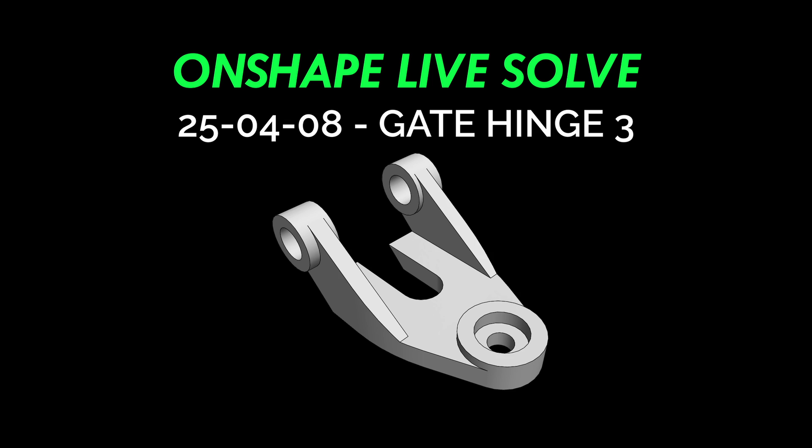And for today's live stream, just to kind of keep things rolling along, I'm just going to model this with you. So here we are. We're at TooTallToby.com. We're going to say get started, and we're going to take a look at the challenge 25-04-08. Now, if we go all the way down to the bottom here, we see that model is reserved for members who have the Practice Models Premium subscription.

But here at the top, we see that it is available in our featured challenge practice models. So let's get in here, 25-04-08, and let's try to model this up using Onshape. So I'm going to say click here to begin and reveal drawing and go. So what is the mass of this part in XXXX grams?

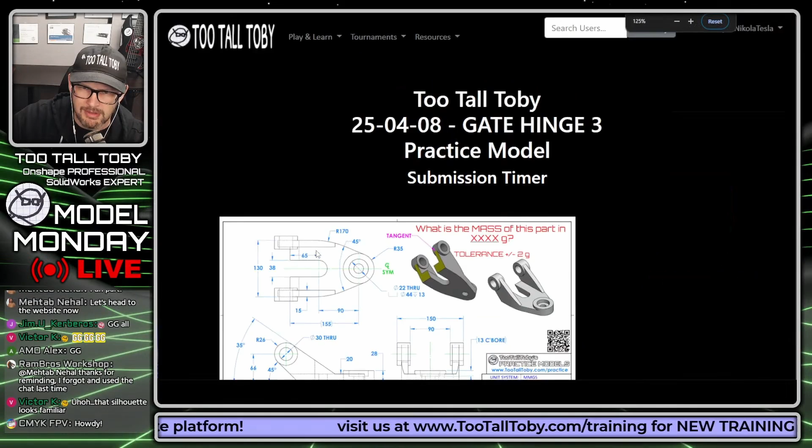And for a model like this, what I'm going to try to do first is ask myself, where should the origin be? Now, I know the clock is running. I know that I'm kind of burning off time here, but I think that if you come up with a good game plan, you can save that time on the tail end. So I'm going to try to model this part up, and I'm going to start out by asking myself kind of how I would build this part.

And I think that the way that I would build this part, feature by feature, I would probably start out with this kind of base section here and then build off of that. Maybe I'll build this fin that comes up and has this circular boss here, and then I'll mirror that across. Maybe I'll create a circular boss here, bring it up, and then I can do my counterbore geometry.

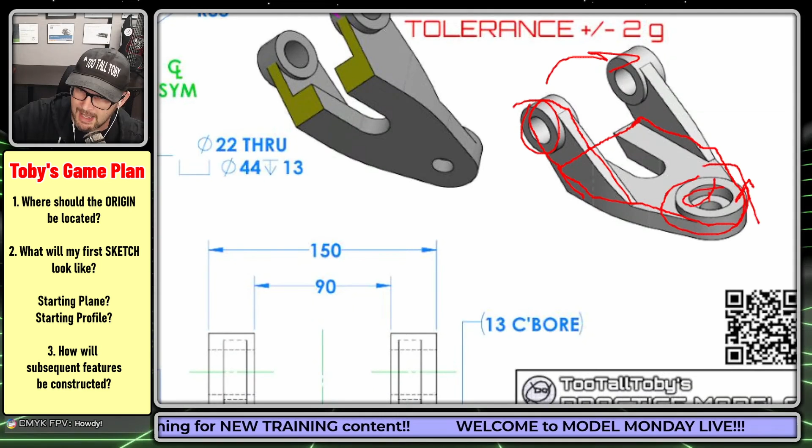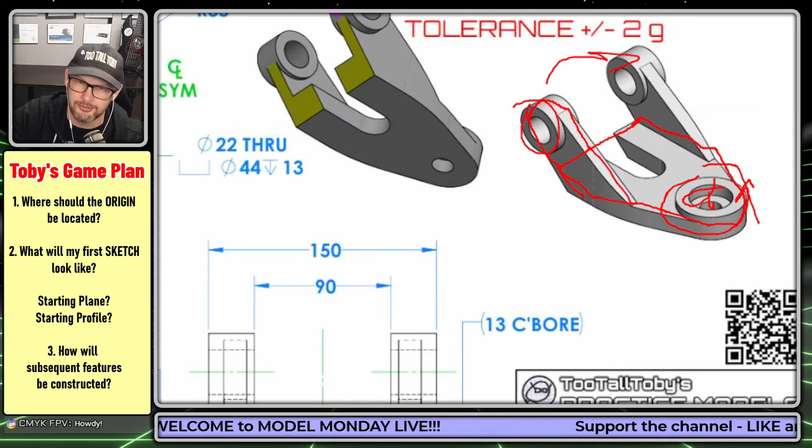So I think that's going to be kind of the general order that I'm going to use, but this is something you always want to think to yourself. If you've got something physical in your hand and you're going to model it up, look at it and ask yourself the order in which features should be built and the different types of features that you might be using to construct that model. So it looks like for this model, it's mainly just going to be extrudes, boss extrudes, cut extrudes. That should give me most of what I need for this model.

So now I'm going to get a little bit more nuance with my game plan, and I'm going to ask myself, well, where should the origin be? If my first sketch is going to look something like this, where should the origin be? And I think I'll put the origin right here. Everything is centered, it's center line symmetric, and I've got this 90 dimension and this 155 dimension here. So I think it makes sense to have the origin right here. It's a nice little baseline for some of my dimensions in the model.

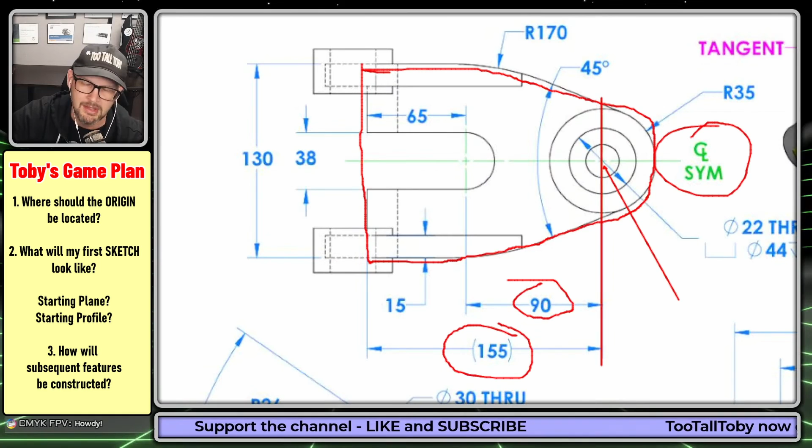So then the next question is, how much detail should I include in that first sketch? And I think that because I'm working in Onshape, I'll probably opt to include quite a bit of detail here and then just extrude from these sketches. Now, certainly if you're using a different CAD package, you could still use a similar workflow where you include all the information in your first sketch. It's just a matter of what you're comfortable with, and are you comfortable extruding multiple contours from the same sketch? And in Onshape, I am very comfortable doing that.

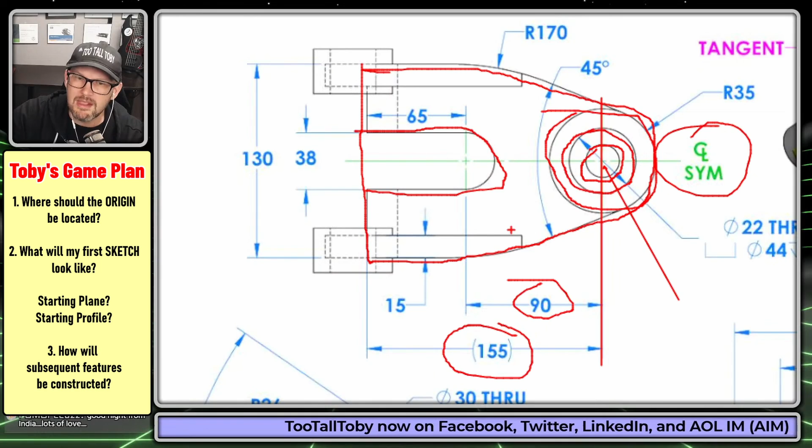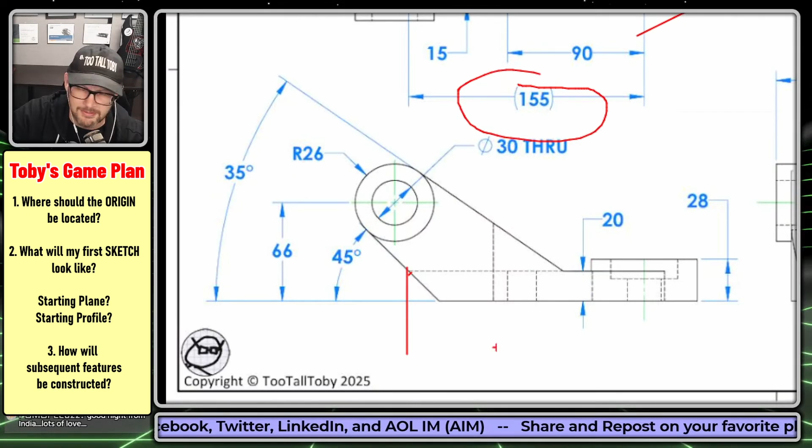Now, one thing that makes this model a little bit tricky is that we've got this dimension here, 65, or this dimension here, 155, which is coming from essentially this sharp edge right here, this blade edge that's being created by this 45-degree cut. So once we create the dimension to here, which is this 155 dimension, we're going to need to cut this thing off along the back side to leave us with that coplanar geometry along the back side of this part. And that's kind of the one thing that makes this model a little bit tricky.

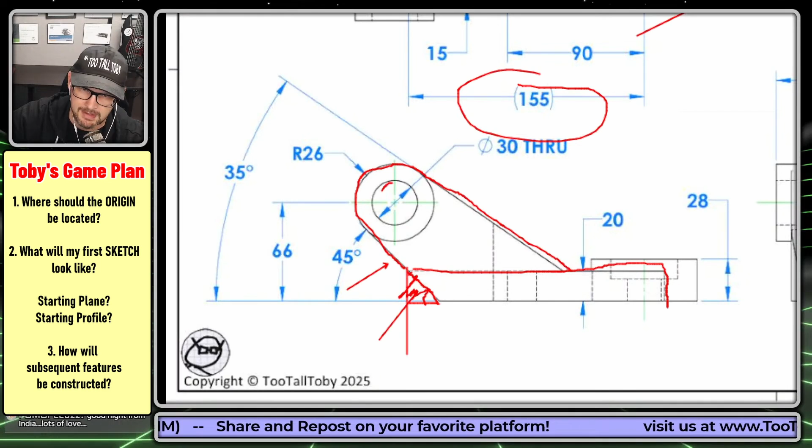So I think that after I create that basic shape, that basic extrusion, I'm going to pretty soon after get in there and cut away that corner. And then I think I'll create this as my next sketch. Create this geometry up here. Create that geometry as my next sketch, and that should pretty much take care of any of the tricky areas of the model.

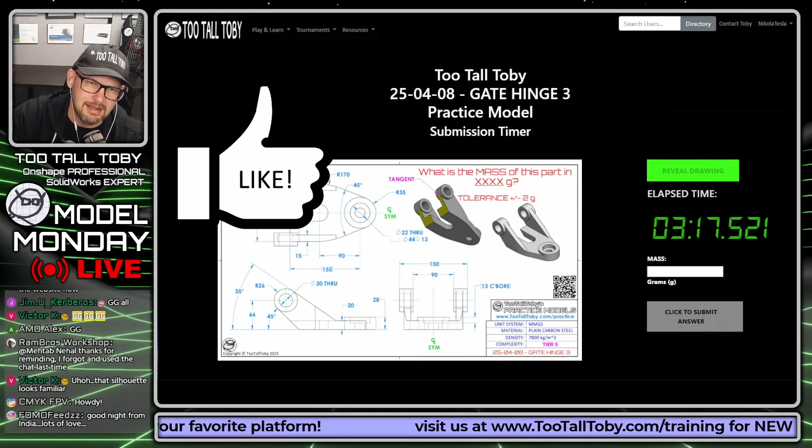Now, I know that at this point I've already run off 3 minutes of the clock, and that may seem like a lot of time, and maybe it could even seem like a waste of time to you. But like I said earlier, I think it's really important to take a few minutes and come up with a game plan before you actually jump into modeling the geometry. But now we are at that point. Now we are ready to model that geometry.

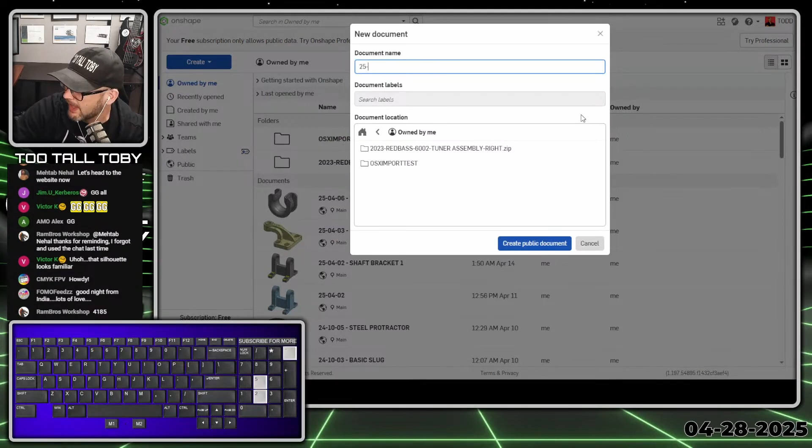25-04-08, gate hinge 3. I am going to create this in the public space, so if you are an Onshape user, you can always log in and search for this document name, and you can take a look at my entire feature tree and history in the Onshape history section. So you can always look through and take a look at my model.

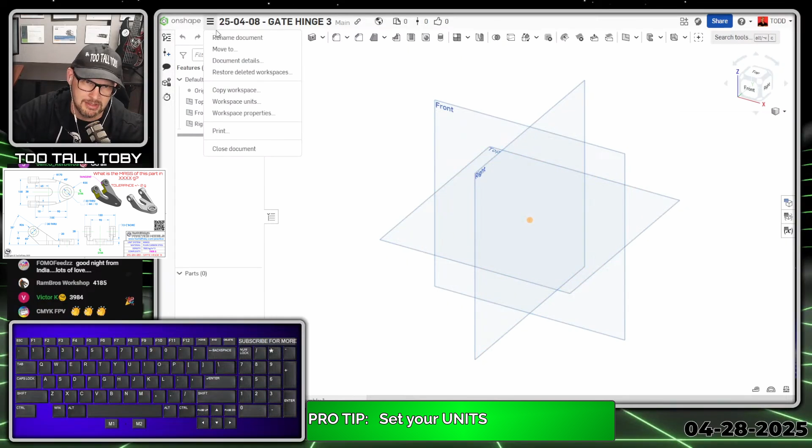And so now, following my game plan, the first thing I'm going to do is go to this hamburger menu, and then I'm going to say workspace units and make sure that I'm working in millimeters, make sure that I'm working in grams, which I am. So now I'm going to go top plane, begin a sketch, orient my view, and I'm going to do that using the N key to orient my view.

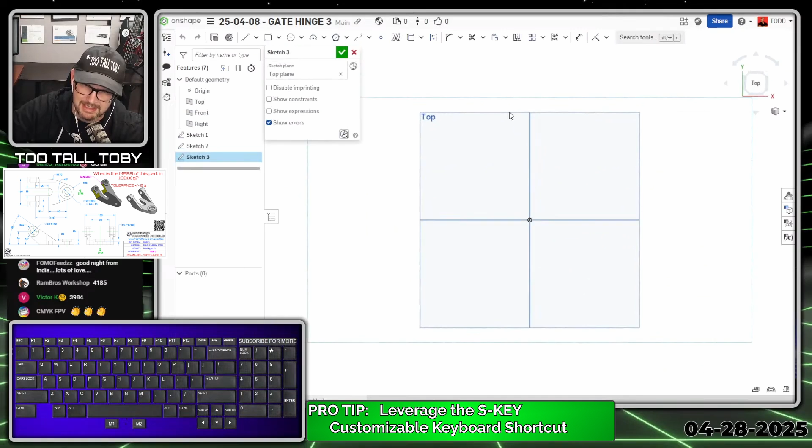So that workflow is pick the top plane, press the S key, begin a sketch, press the N key to get normal to, press the S key and jump into a circle command. And I'm going to create a circle here with a diameter of 22. That's my through hole. Create another circle here with a diameter of 44. That's my counterbore hole.

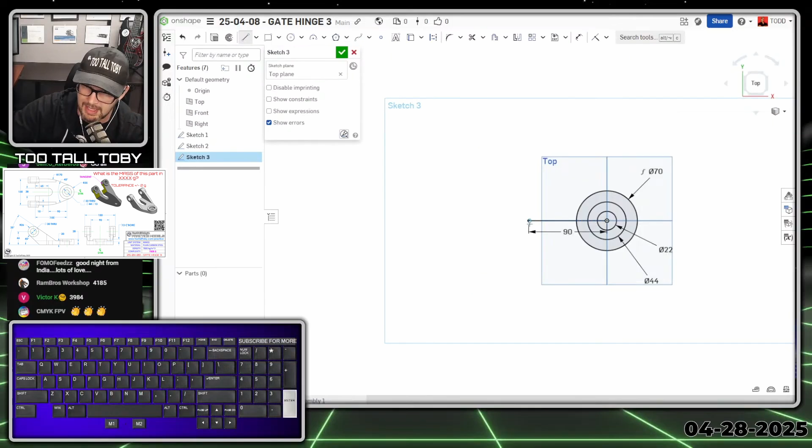And create another circle here with a diameter of 35 times 2. That's that arc that's out at the front of the model. So there is what the beginning of your first sketch should look like if you're following through as a tutorial. And then I'm going to create a line here, and this line is going to move over in this direction, and it's going to have a distance of 90, enter, and then it's going to move over in this direction, and it's going to have a distance of 65, enter.

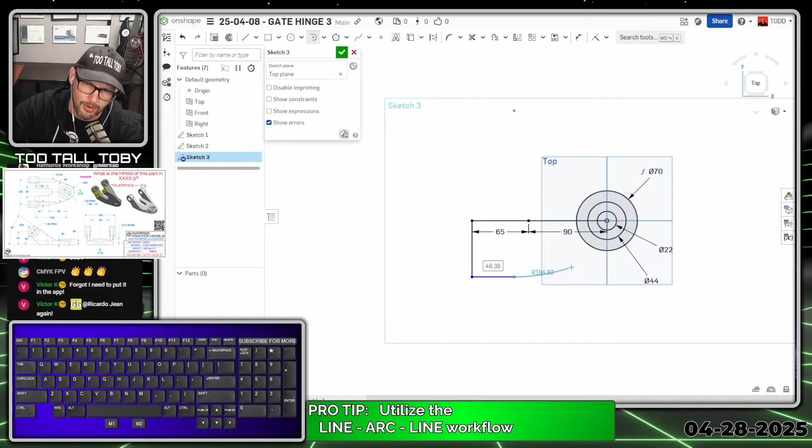Then I'll come out this way, and this line here is going to come over about 130 over 2, so about 65. Come over in this direction, single click. Now here's a little trick you can do in Onshape. You can move away from that end point, come back to that end point, and then move away again, and that creates an arc for you automatically. And when you left click on the end point of that arc, you can let go of your mouse and you can type in the dimension 170.

And then finally, I'm just going to take this line and connect it here on this point. I don't think I'm going to be able to get tangent to the circle and tangent to the line or the original arc. That's what I really want. I really want to be tangent to this and coincident to the circle, all three. That would be like the trifecta.

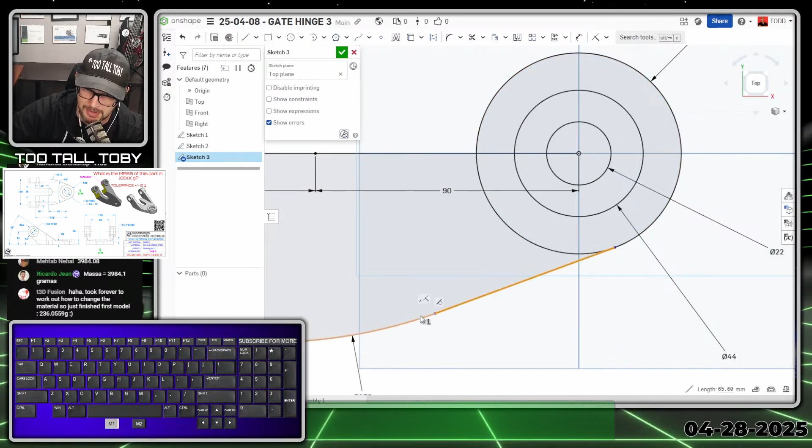I don't think I'm going to get all three, so I'm going to hit escape here and just pick this and this. Make sure that they are tangent by pressing T. Then I'll pick this and this, make sure that they are tangent. Maybe I did get all three. Wow, I'm like a pro. Onshape certified pro.

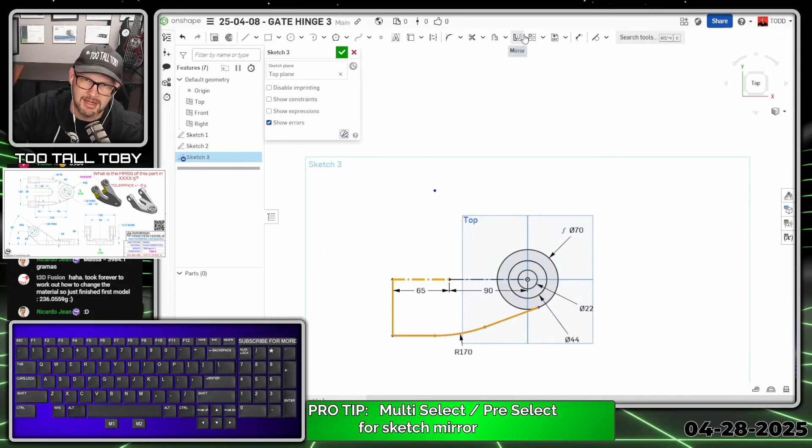I'm going to click on this line here and I'm going to press Q. I'm going to click on this line here and press Q as well, just to make them for construction. And then I'm going to take this line, arc, line, and this construction line. And then I'm going to click the mirror command to mirror that over to the other side.

So now I'm ready to get in here and create a line. Single click. I could kind of put my mouse over this point so that I get exactly vertical to that point. Single click, move back, move over that end point, and then move around again. Takes me into that little arc command, and then I can close off that geometry. And that's how you can create that tombstone shape all in one pass, and that's a very good workflow to practice.

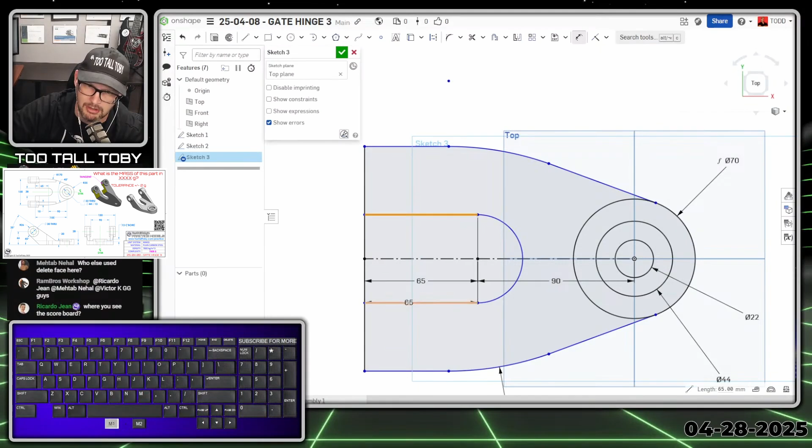Now this point and this point, I'm going to press I. That way those 2 points become coincident. And then I'm going to press the S key here and just add a dimension from here to here. Now we also could have done that with a slot. Slot would have been totally reasonable there as well. But I'm just going to do it here with more traditional sketch geometry.

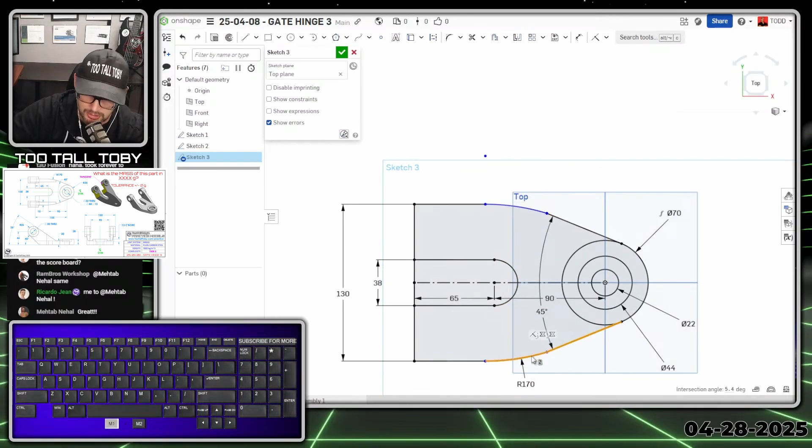Continuing with my dimension command, since I'm already in there, I'll make this 130. And then I'll add in an angle here of 45 degrees. And looks like maybe I'm still missing a tangency here somewhere. Let's see, I'm going to grab this point and just move it. Yep, I sure am. So let's do it down below here. This and this, press T for tangent, and there we go.

And that is what your first sketch should look like if you're following along as a tutorial. I'll kind of drop these dimensions out here so you can see them a little bit more clearly. But that's probably what you want your first sketch to look like in Onshape so that you can then jump in and start extruding this geometry. So let's jump right into that next step.

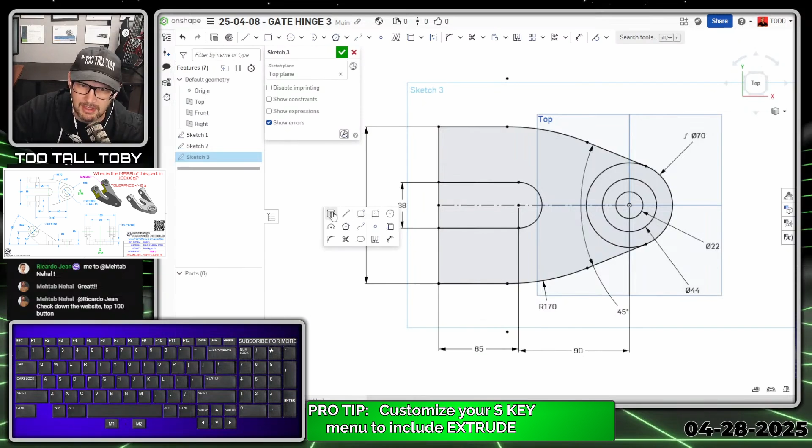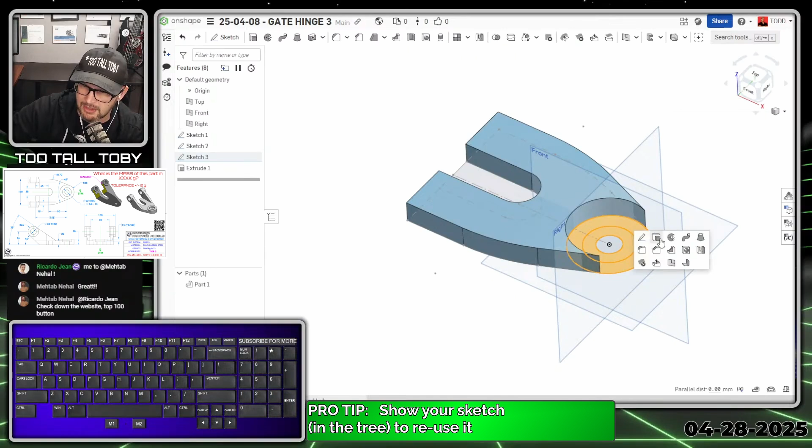So we're going to go here. We're going to go S key, extrude. Press the space bar to clear everything, and that way we can just go through and pick those different regions. So we're going to pick this region here to extrude. That's probably all we need, right? Take that region and we're going to extrude that out to a height of 20, and we can press enter, enter again. And then we could pick maybe this region and S key extrude, and we can bring that up to a height of 28.

And then we can pick this region down here, the kind of counter bore region, and we can press the S key and choose extrude. Now this is going to be a remove because we're going to be removing material. And instead of that remove beginning from down here where the sketch plane is, we'll say starting offset. And in Onshape, when you do a starting offset, you could say you want that to offset to a face. So you say you want this to be a remove, start that offset from a face, and then all you need to do is put in the depth of your counter bore.

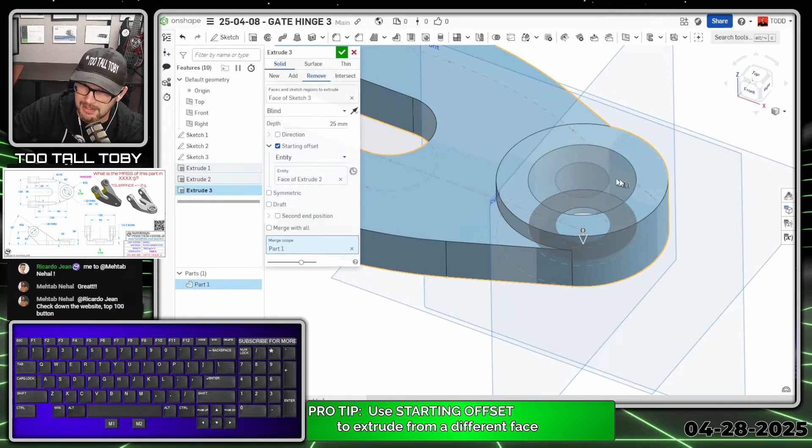Now, we could have also done that counter bore with the hole tool. I use the hole tool a lot in my tutorials, though, so I just kind of wanted to mix it up a little bit for this tutorial.

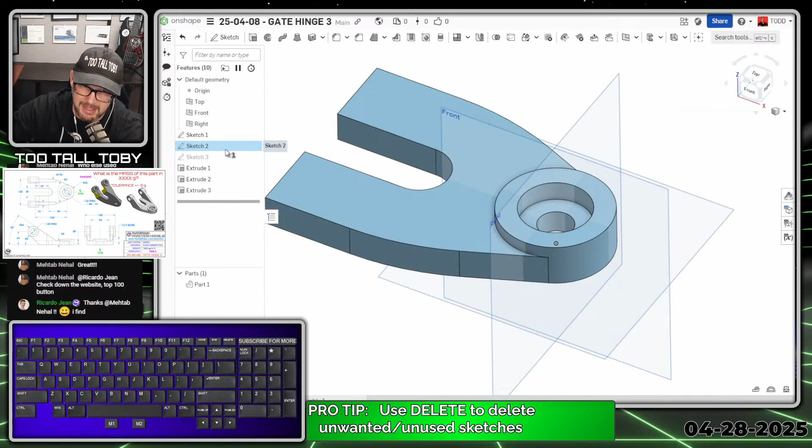All right, and now we're going to hide this sketch here. And I think these extra sketches were just from some selecting I was doing in the beginning as I was getting started and showing some shortcuts. So I'll just get rid of those. So there we go. We've got this one sketch, our main sketch here. And then we've got this extrude, extrude, extrude for that main plate, this circular part that's sticking up, and then the counter bore.

So now, again, sticking with the game plan, pick this face, S key, begin a sketch, N key, and then I can sketch a triangle here and then use that triangle to remove that geometry at 45 degrees.

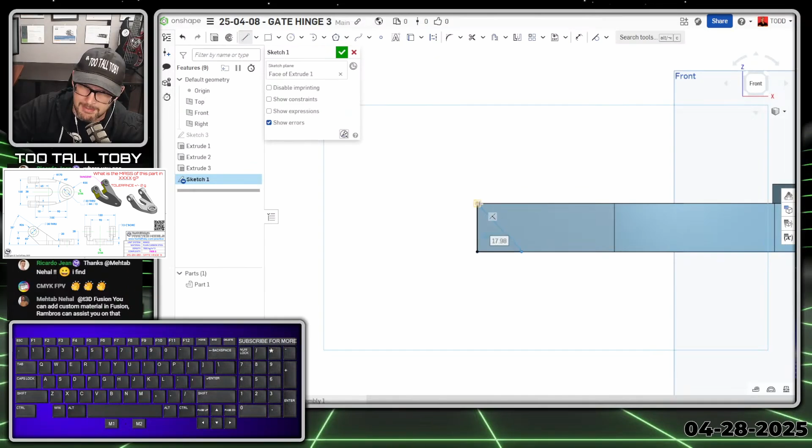So S key dimension, add in a dimension here at 45 degrees, and then S key extrude, and this is going to be a remove through all. So remove through all, we hit the check mark, and there we go. That gives us that nice knife edge that's running along the backside of that model.

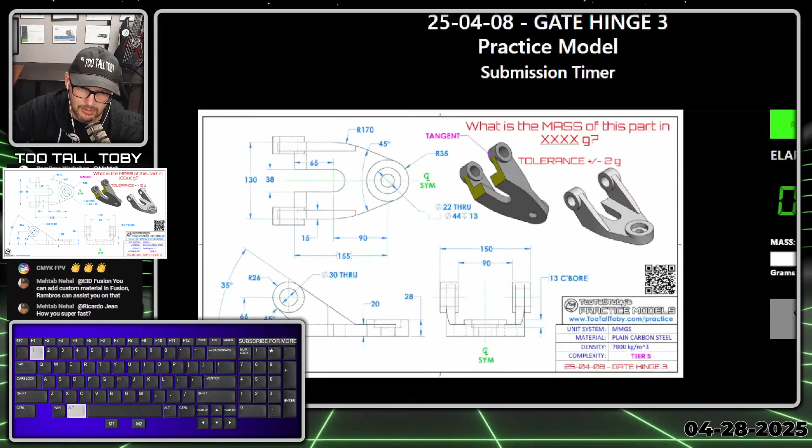And so now we can begin getting into what is going to be kind of the end game of this model, this blade section over here. So we can create a collinear line, a line here at an angle, create this shape, create this circle, and then we should be able just to continue to do those extrudes like we did earlier.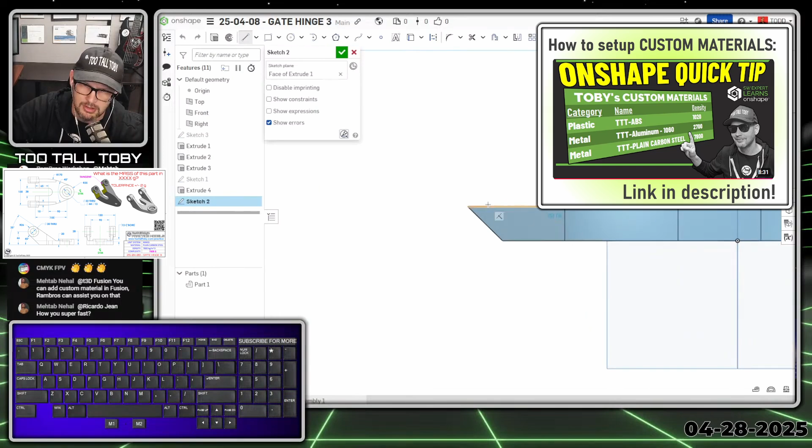So what we can do here is we can go to this face here, S key, begin a sketch, N key to get normal to, S key to begin a line. We could maybe start our line here at this point, or maybe even over here. Come over here to this point, just create like a quick line running along the bottom. And then in Onshape, if you hold your mouse over this line first, and then you move up in this direction, you'll see that you can get a parallel relationship.

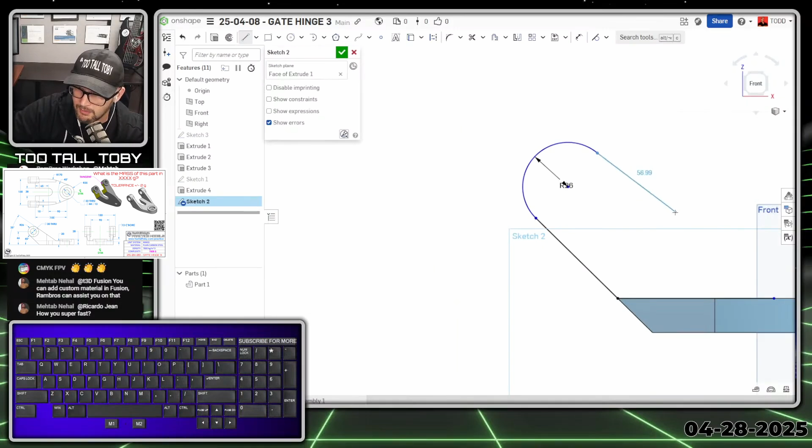So we'll make that parallel, come back, touch the end point, come up and around, and we're going to say this is going to go around to a radius of 26. And then we're going to continue our line here, make sure that we're getting tangent, continue our line down to here. Maybe I'll just drop it in space, and then I'll grab this endpoint and just connect it here. And that way those two become tangent.

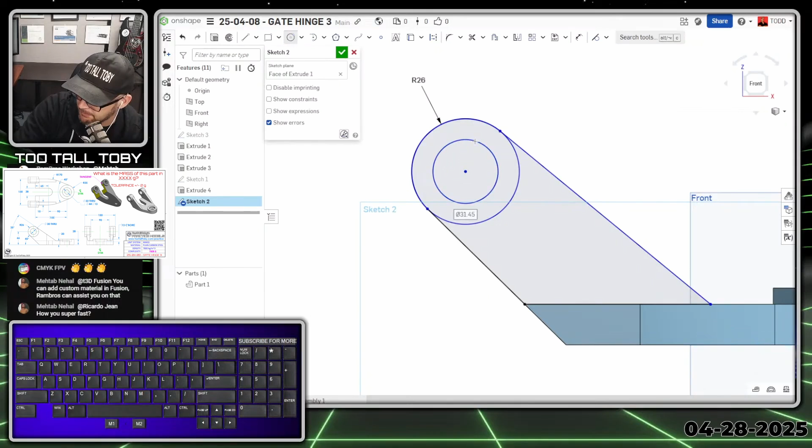Now, really, this should probably be a circle. So I can just jump into the circle command and just make a circle here like this. Boom, we've got our circle. And then I can drop in another circle here with that diameter of 30. So just making a second circle overlapping with the first circle, that's fine. In Onshape, that's okay. It's not gonna hiccup or anything when we go to extrude. It's just gonna let us use the closed region.

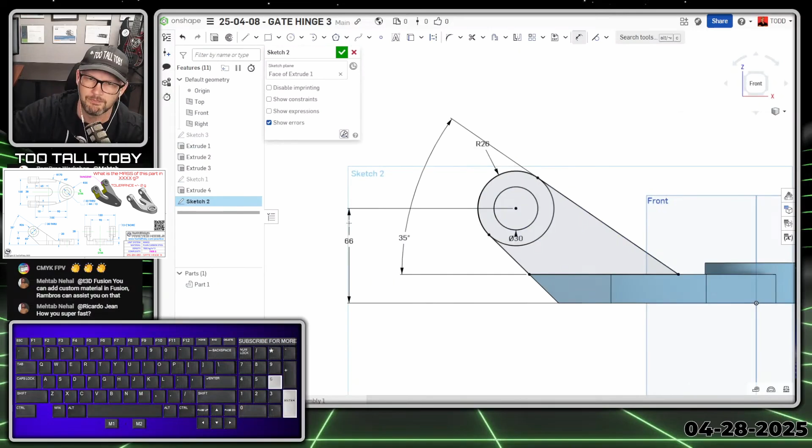So now the final thing I need to do here is just add some dimensions. So there's gonna be a dimension from here to here with an angle of, I believe, 35. Yep, 35 for that one. And then there's going to be a height dimension here from this point down to the bottom of the part. And that height dimension is going to be 66. And there we go. Nice, fully defined sketch.

So that is what your third sketch should look like. The second sketch was that little triangle shape to lop off that 45 degrees. And then that is what your third sketch should look like. And so now what we can do is we can choose to extrude that geometry. So S key extrude. And we're going to say that we want to extrude, let me hit the space bar here, just this section to a depth of 15 millimeters. And we will reverse the direction on that. There we go. That'll be an add.

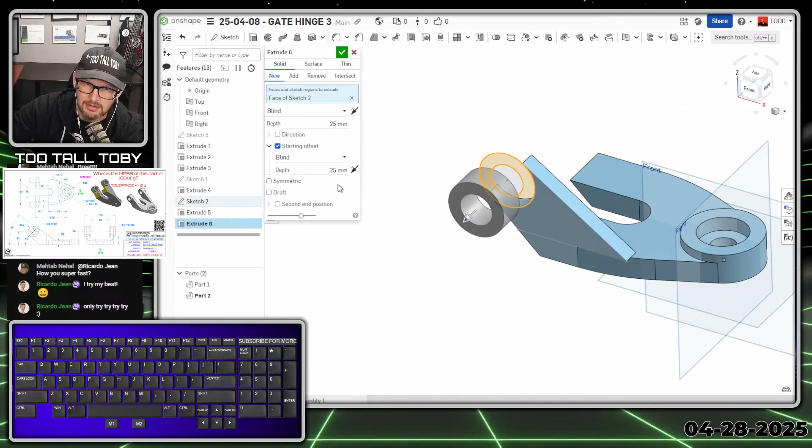And then we can show that sketch again, and we can pick this region here. And we can do S key extrude. And now, just like we did earlier, we could say we want that to start with an offset. So I think this starting offset is going to be, let's see here, it's 130 to the, let's just do some quick math here. So it's 130 to the original walls, and then it's 150 here to the outer walls. So that's going to be 10 per side. So we're going to have 10 here.

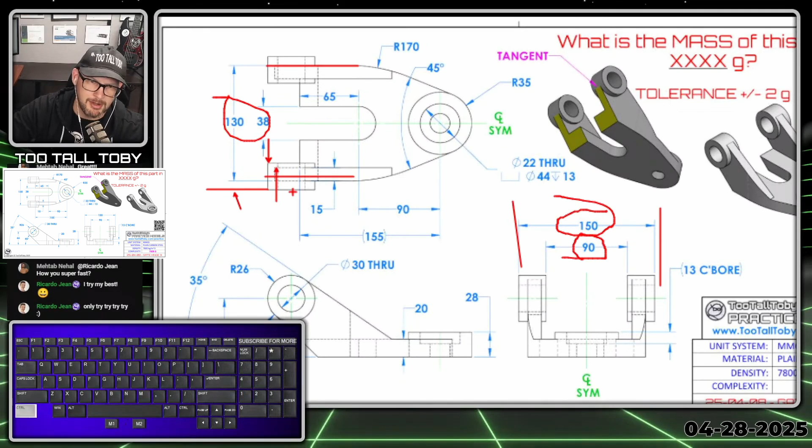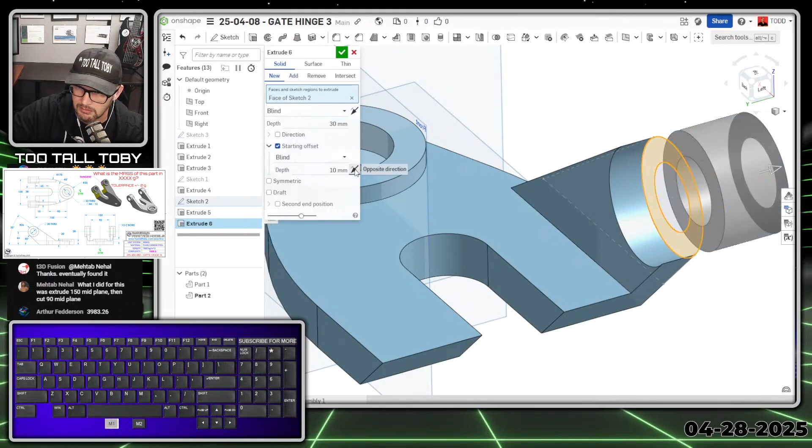So there we go. There's our 10 millimeter offset. And then the depth of this thing is going to be 30. Right? Whoops. Let's see here. Starting offset. Depth is going to go in that way. There we go. I flipped the wrong one. The depth is going to be 30.

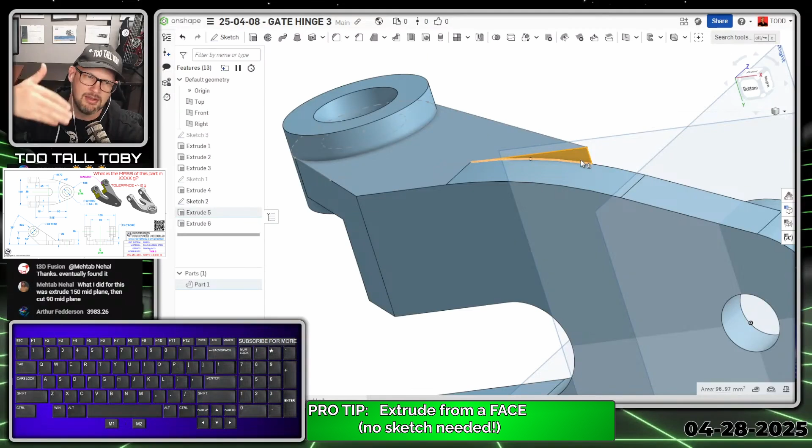Now, the cool thing is that once we mirror this, we can really quickly double check and make sure that we got that math correct. But before we mirror it, let's do one more extrusion, and that's going to be a cut extrude here. And another really cool thing about Onshape is I can just pick this face. I don't have to make a sketch. I don't have to pick the face, begin a sketch, and then do convert entities. I can just pick this face and then do extrude, remove, and through all.

And so you see Onshape grabs the boundary of that face without forcing me to create a new sketch. It just grabs the face geometry and extrudes that. So that way I can get that whole side face to be nice and smooth and kind of continue that curvature like what we see in the drawing.

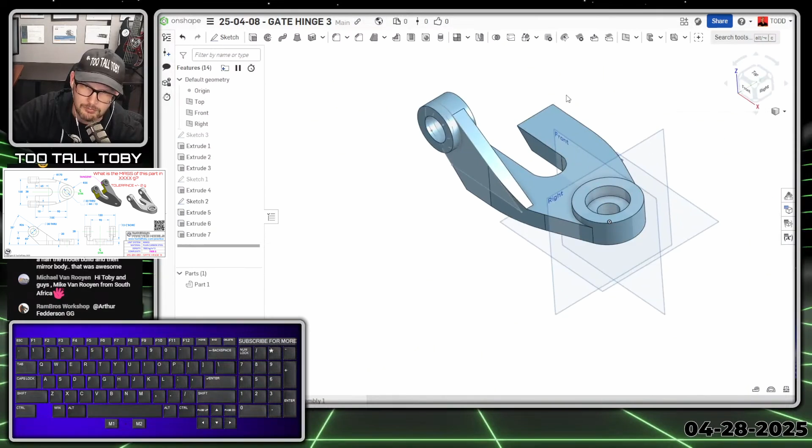So now let's go to a mirror command. And in Onshape, you want to remember that up top here, you want to set this to a feature mirror. And we will feature mirror these 1, 2, 3 features. And then our mirror plane is going to be the front plane. So you pick the front plane here, and there we go.

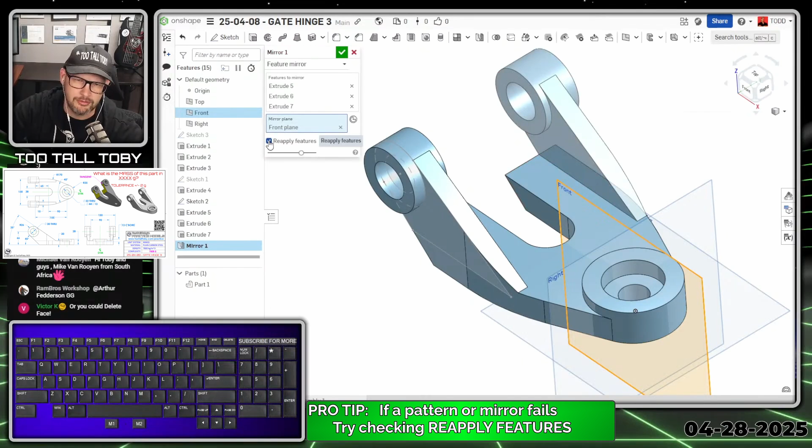And anytime you're doing a pattern or a mirror in Onshape, if it goes red like that, just remember you can hit reapply features, and that'll almost always take care of it. Not every single time, but a lot of times that'll take care of it. So we hit the green check mark, and there we go. We do what's called the final spin. We say, yeah, this looks pretty close to what's on the drawing.

So now we're going to press the letter P. That hides our planes. We're going to right mouse button on the part, and we're going to say assign material. And then the material is shown in the title block. So that material is plain carbon steel from the TooTallToby custom materials library.

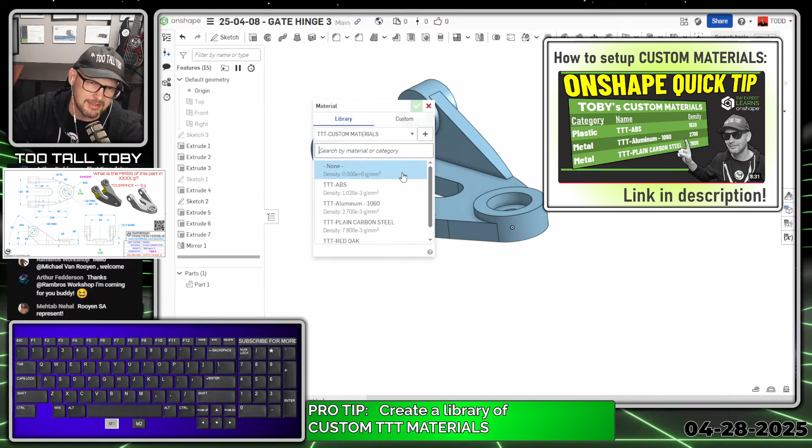And then we can take a look down here in the corner, and we can see the mass properties button. Click on that mass properties button, click here on the part, 3984.1 grams. So let's go back into the TooTallToby practice models app, and it's going to be, wait, what was it again? 3984.1 grams. So 3984.1 and enter. And oh yeah, we did it.

Congratulations. This answer is correct. And you can see here that we did this using Onshape, got the correct answer, and I'm going to say submit. And when you click submit, you're going to be awarded 1 point on the community scoreboard. So I'm going to say submit. And we did it. Well done. Your answer was within the specified tolerance.

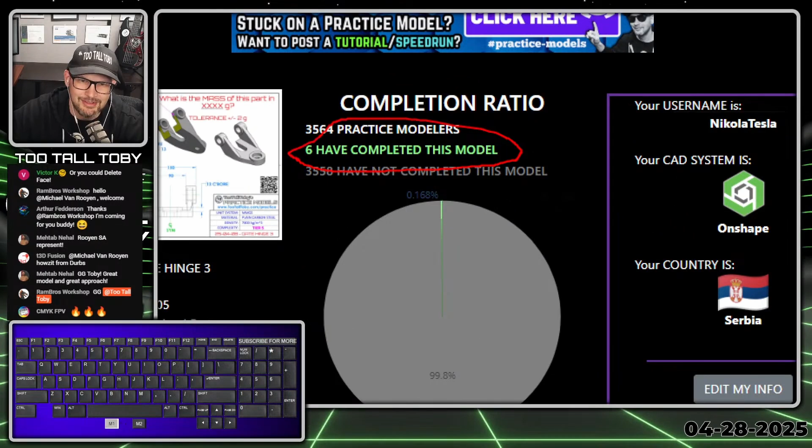I like it. So now if we go back to more challenges, we can take a look here at the practice models featured challenge practice model. And we can see here that 6 people have completed this model. So 6 of you watching, and maybe somebody who's not watching, have completed this model. And let's take a look here at our top 100. And it looks like our very first finisher was none other than Ricardo Salado. So he continues to dominate, and looks like he finished it in 5 minutes and 40 seconds.

Wow, that is impressive. And CSWE Victor did it in 6 minutes and 2 seconds using Onshape. Mehtab did it here in 6:47. RamBros Workshop did it here in 7 minutes, 20 seconds. And Undefined Explode did it in 13 minutes, 47 seconds. Wow, wow, wow. Congratulations to all of our finishers here in the top 100 leaderboard. This is really cool.

Let's just refresh, see if anybody else is going to get in here. But wow, that is awesome. That's fast, dude. 5 minutes, 40 seconds. That's screaming. So good job. Great job. CSWE Victor, you can see he's using Onshape here. A lot of times what he does is he goes into the TooTallToby Discord and then drops a link.